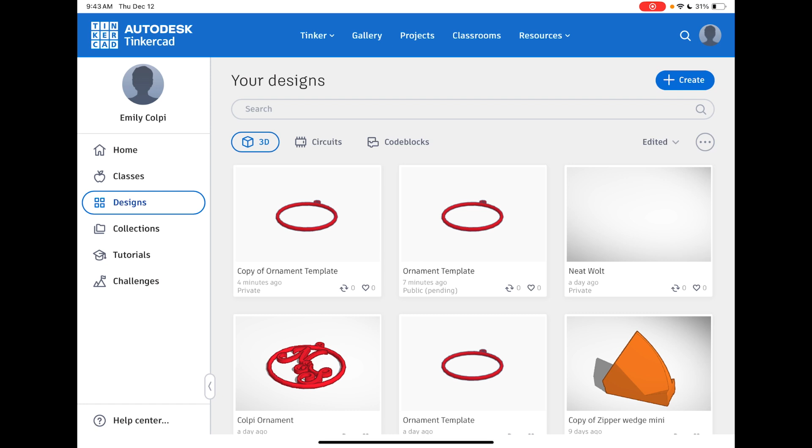But if you want to see how I created the outline of my ornament, this is what mine looks like. I used the ring shape to make the outline, and the ring shape is down here, but there are several different shapes that would work just fine for this. Mine is 3.5 inches in diameter.

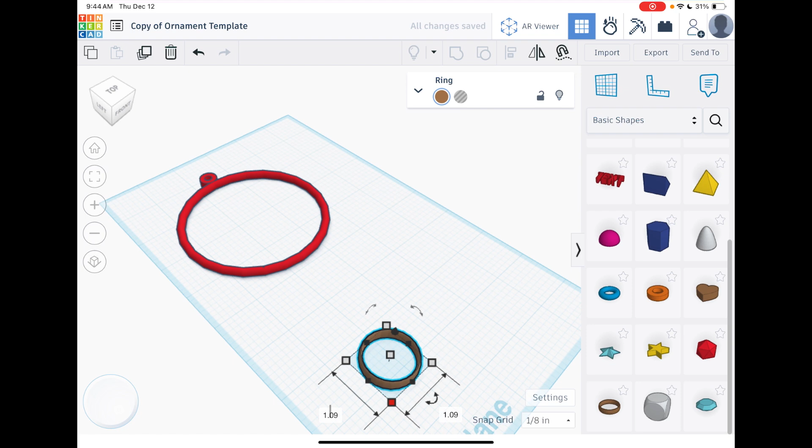If I tap my shape one time, I just dragged and dropped this shape on there, and if you tap the white boxes, you can see the size. So I changed the shape to 3.5 by 3.5. And then I can just use the arrows to move it back onto the work plane.

I also don't want it to be too tall because I'm going to 3D print this thing. So if I tap the center white box, I can see how tall it is. I'm going to make mine just a little bit less tall, at 0.2 inches.

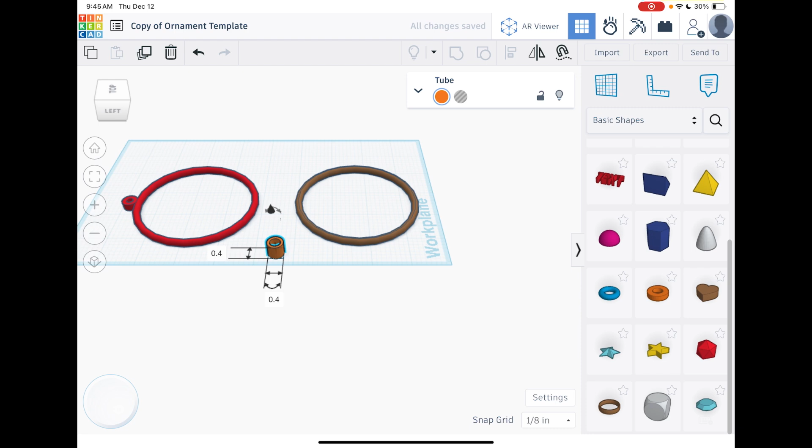Then I added a little loop to hook the ornament hook into, so you could use any of those ring shapes. I made mine much smaller, about 0.4 inches by 0.4 inches. And I want the height to match, so zoom in on that, and we'll make that 0.2 like I did the other one.

Now if I want to join these two shapes together into one shape, I need to move it. So I'm going to hold down the Shift key to make it move quickly while I use my arrows. And rather than try to guess, I'm actually going to align this. If I hold down the Shift key, I can select that object and this object.

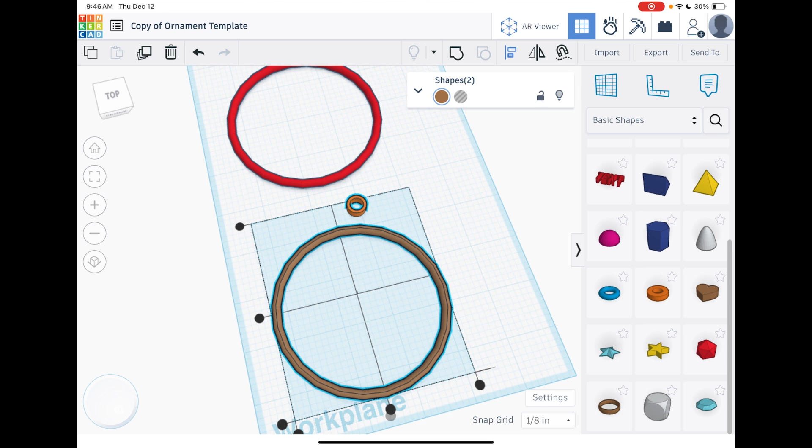Then if I go up here to this shape right here, this allows you to align. So I want this shape here to be aligned center with this shape, so I'm going to choose this black dot. Now it's perfectly aligned that way.

So now I just kind of need to move this. I'm going to move my view a little bit. I can use this box here to change my viewpoint. Perfect. Okay, so now I just need to move it just a little bit.

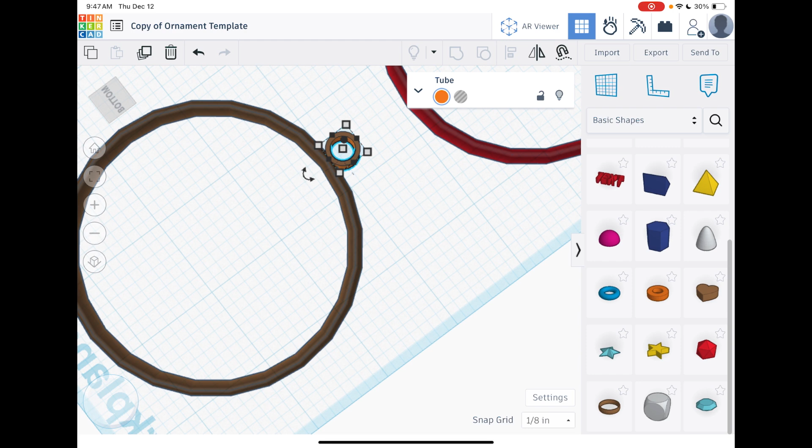It doesn't need to be totally overlapping, but it needs to have enough overlap that when I merge them together, it won't break off when I try to 3D print it. So it looks pretty good, there's enough connective tissue there.

Okay, so last step is I'm going to select that object and that object, and I'm going to use the grouping tool up here to group them together into one shape. You'll know it worked because when you click out of it, everything will be the same color. So now that's one object, and if I try to move it around, it all moves together.

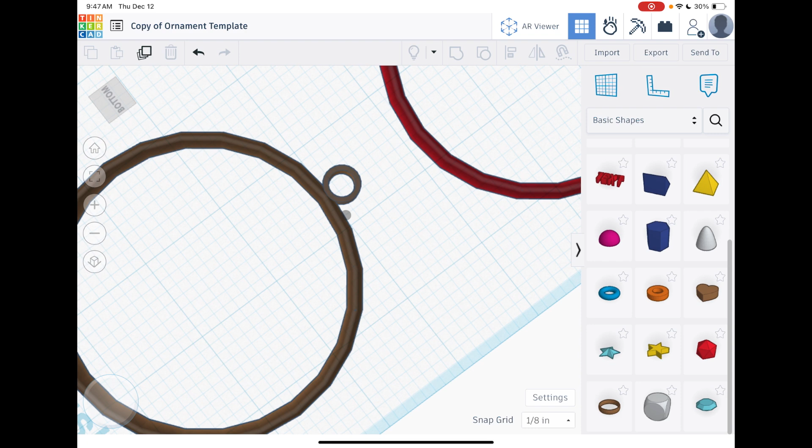So now I'm ready to add the custom font. There are letter shapes in Tinkercad, but they're really basic and not, to my mind, a very pretty font. So here's where the hack comes in.

You're now going to go over to Canva, and in Canva you're going to create a monogram or other text that you're going to then import into Tinkercad. Make sure that you're using text box, not elements. I tried it with shapes and with graphics and it doesn't work.

You're going to add whichever text box you want, whatever font you like. The main thing with the font is it does have to be touching, otherwise you can't 3D print it—it'll kind of fall apart because there's nothing connecting the parts together. You can search for the word calligraphy to see a lot of the fonts that flow nicely.

So in my case, I made a monogram. I didn't want to do a whole name, so I just did each letter as a separate text box because I wanted to be able to move them together and overlap them. I made my last name initial much larger. So once you have everything touching the way you want it to and the font you like...

The last step is to export. So I'll click Share and I'll click Save As. This is the part that will be new for you: you're going to change PNG, switch it to SVG. This is a file that can be read by 3D modeling software and laser cutters.

I'm also going to make sure I say transparent background—I do not want this background. I'm going to hit download and save this file to files.

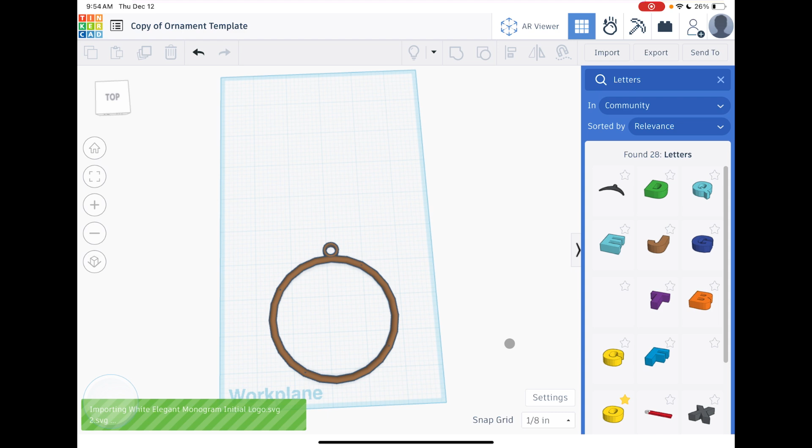Now I can head back to Tinkercad and I'm going to go to import, choose File, choose File, and pick that file that I just did and hit Import. This may take a few seconds. It will probably come in too big, totally fine.

We can adjust the size by numbers if you'd like, but you can also drag and drop those corner pieces. And then we're just going to move it into place in the center of the ornament. The goal here is to have it touching enough spots, not overlapping and hanging out the sides.

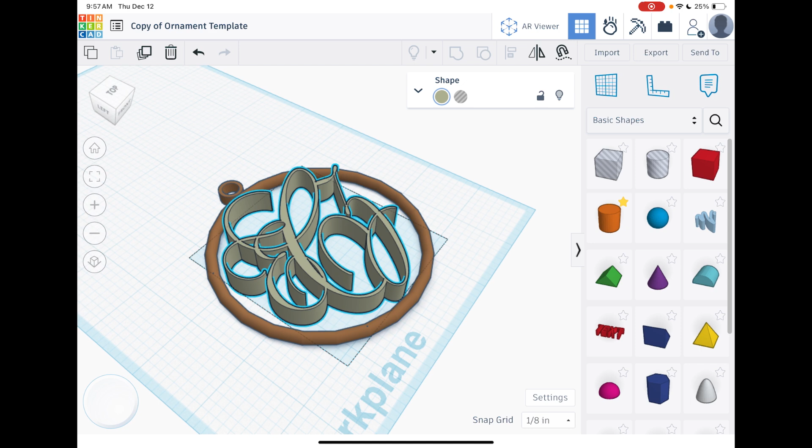But also to touch the sides of the ornament enough that there's something for it to stick to, so it's not a separate part that falls through the middle when you 3D print. So it looks like I need to go just a little bit bigger. I could also see if I move to the side that it's too tall, so I'm going to make this 0.2 inches tall like my ornament.

And now everything will lay flat. Okay, so last step, I'm going to group it all together so it's one object. So now I have one big ornament, and I need to export this so it can be 3D printed.